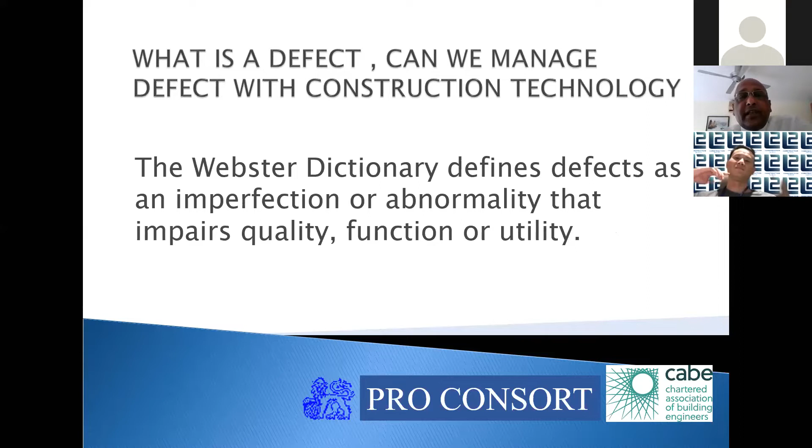If you look at a dictionary, one of the best being Webster's Dictionary, it defines defects as an imperfection or abnormality that impairs quality, function, and utility.

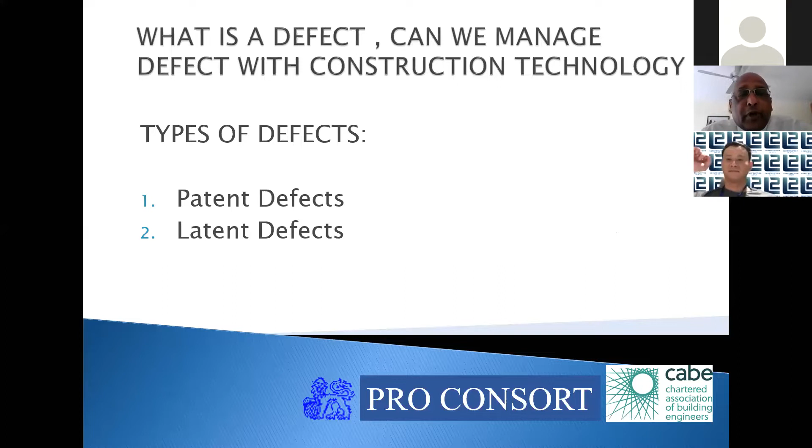There are generally two types of defects: one is the patent defect, the other is the latent defect.

What is a patent defect? Patent defects are obvious—something you can actually see, observe, and visualize by eyesight. Often that means it's an easy fix. These defects are surface level and often merely aesthetic, so accessing and repairing the issue is typically not invasive.

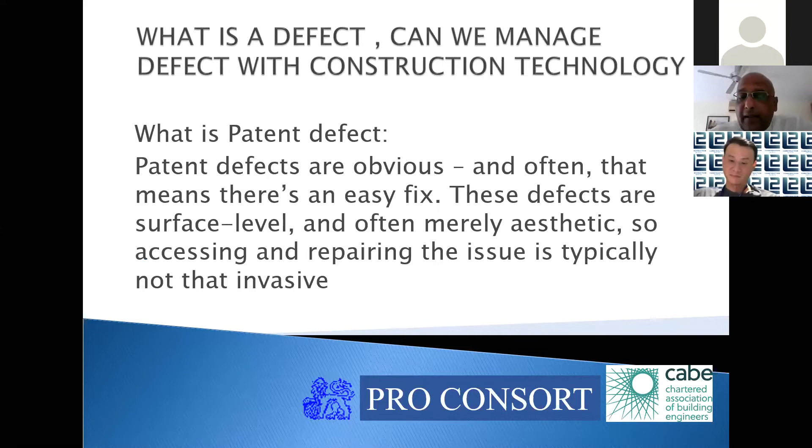What is a latent defect? Latent defects aren't obvious—that usually means they are below the surface, even a defective system in a project. As a result, latent defects tend to be more problematic since it mostly becomes obvious after the defects liability period has expired. These are usually related to design issues, but not exclusively.

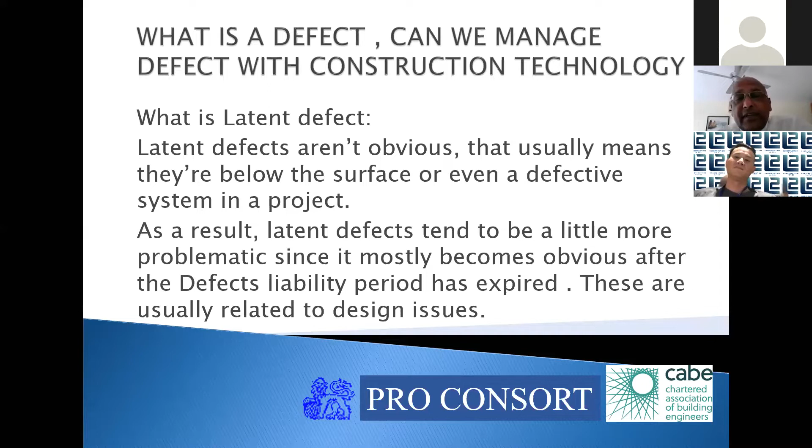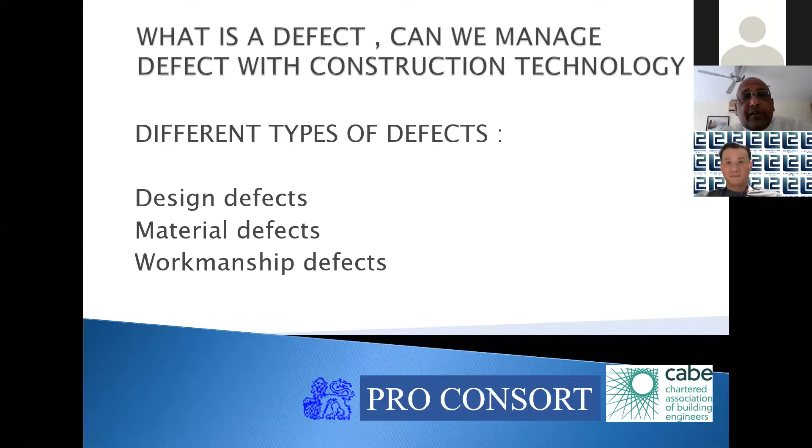From there, we differentiate into another group, what we call other areas of defect: design defects, material defects, and workmanship defects.

Now, basically, from our local research and from CIDB and other associations, we have come out to 5 areas that defects can be defined as follows.

One, non-compliance with building codes and UBBL, meaning Uniform Building Bylaws. Two, non-agreed variation from approved drawings. Failure to meet agreed contractual specification. Premature product failure. Failure to achieve acceptable industry levels of quality and performance on items specified.

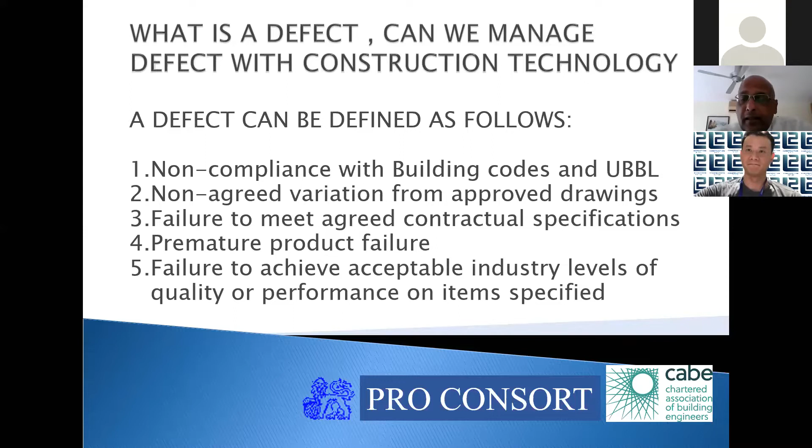Now, what constitutes a defect can change over time with fair wear and tear, settlement, weathering, or aging of materials. Therefore, what constitutes a defect at handover may not constitute a defect after 24 months. Example, a deep scratching on a polished floor is a defect at handover, but may not be several months later due to fair wear and tear.

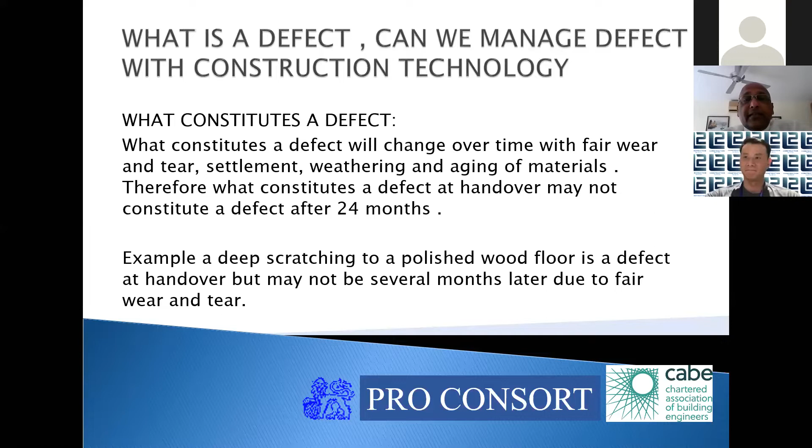If the contract specification and documentation do not provide sufficient information, the issue may be covered by an existing Malaysian standard or construction industry standard 7 by CIDB. The developer is required to remedy defects notified within 24 months of completion of the building works.

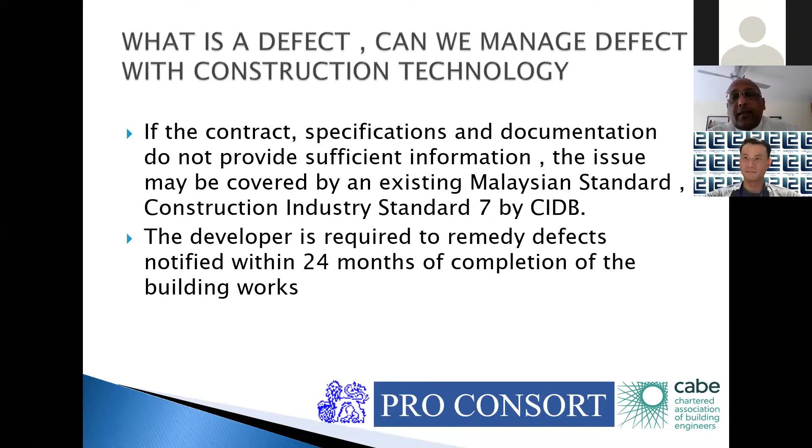Next, please. Now, what is not a defect? A developer cannot be held liable for an event that is not attributable to the developer. One, damage that occurs outside of human control. Two, damage done by a person outside of the developer's control.

Damage resulting from failure to undertake normal maintenance. Damage resulting from a failure to carry out repairs as soon as practical after the defect becomes apparent. Next, please.

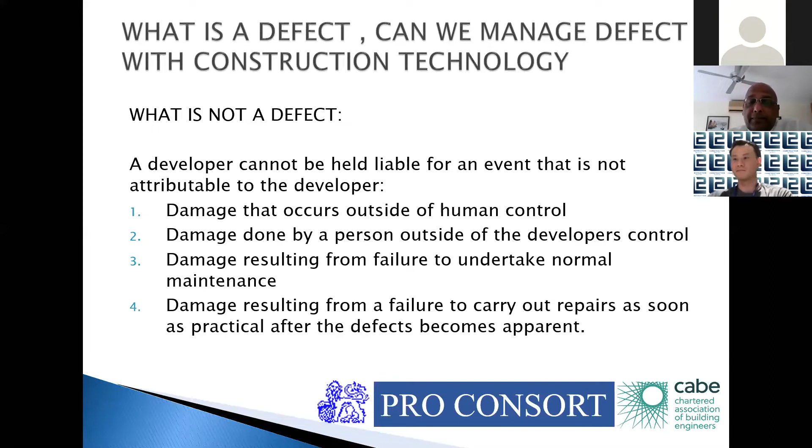Issues emerging over time. Where issues emerge after a 24-month defects liability period, this may still be covered under implied warranties or other legislation, but this may require the assistance of other consultants, building consultants, and lawyers' involvement to identify. Much more difficult.

Occupants' activities. Now, misuse or damage caused by occupants' activities are not considered a defect. For example, allowing water to sit on timber-based flooring such as parquet or strip flooring can lead to swelling and buckling of the flooring. This is not a defect because it is misuse or caused by the occupants.

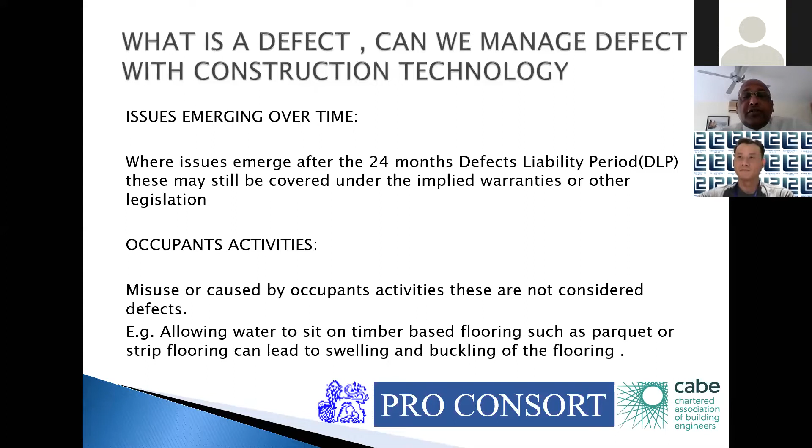Maintenance requirement. All buildings require ongoing maintenance. Any issues that arise through lack of maintenance to building elements, materials, appliances, or fixtures do not represent a defect. So if you take vacant possession of a building and you do not maintain your house and let water seep into the house, that is not a defect.

Design work. Now, design work is actually considered a latent defect. So latent defects don't surface very quickly. Normally you can only encounter this kind of defect after the 24-month period. Design work, carried out by architects and engineers, is included in other legislation such as the Architects Act, Engineers Act.

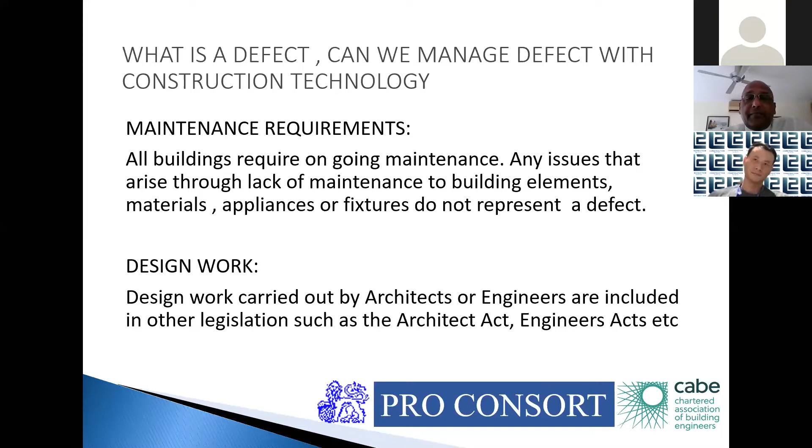Now, inspecting surfaces and fixtures. While some aspects of materials and workmanship can be measured, other aspects such as variations in texture, color, transparency, reflectivity, and finishes should be observed and assessed while in the normal viewing position. Normal viewing position is at an unobstructed viewing angle of 45 degrees or more, and if indoors, with a uniform typical level of lighting. Normal viewing position is an upright position.

You stand upright and then you look at the surface that you are inspecting. Now, the typical level of lighting should be diffuse lighting, not direct lighting. For example, for tile surfaces and painted surfaces, the viewing position is standing at a distance of more than 2 meters. At least 2 meters, you view the surface, and if you find a defect, then you record it down.

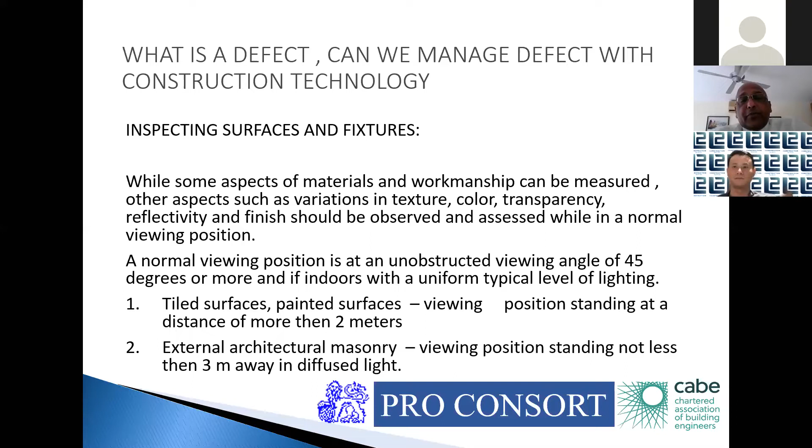Item 2 is external architectural masonry, viewing position standing at not less than 3 meters away in diffuse lighting. So these are some of the examples of how you would inspect.

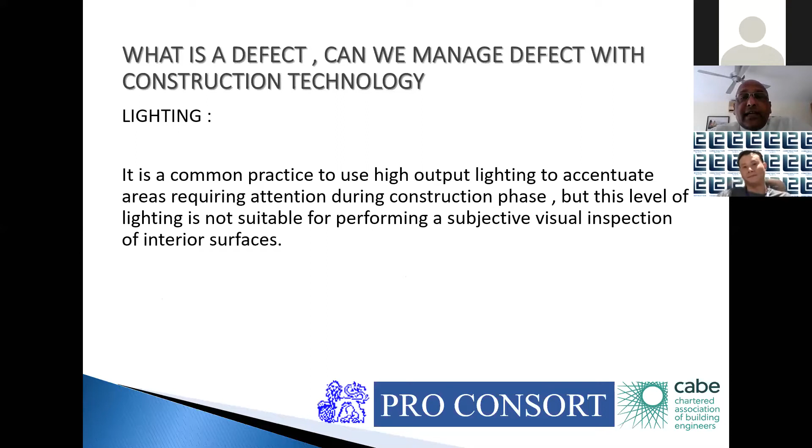Lighting. Now, it's a common practice to use high output lighting to accentuate areas requiring attention during the construction phase. But this level of lighting is not suitable for performing a subjective visual inspection of interior surfaces.

Next, please. Now, I have a recommended checklist. Normally a good developer will provide you with a checklist at the time when vacant possession and keys are handed over to the purchaser. But if he doesn't, then you have a sample that I've given here.

Which comprises of, you start with the internal finishes, you go to ceilings, flooring, and every item you record down what is the defect visually that you can see. So you start with ceiling, flooring, internal wall finishes, tiling, floor finishes, door and windows, electrical fittings and fixtures, plumbing, drainage, cabinet, and bench tops. Now, all these inspections are basically visual. You don't need to bring any other equipment.

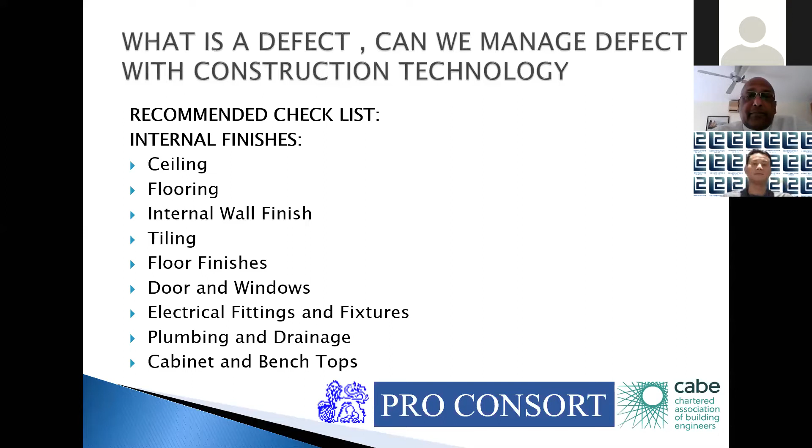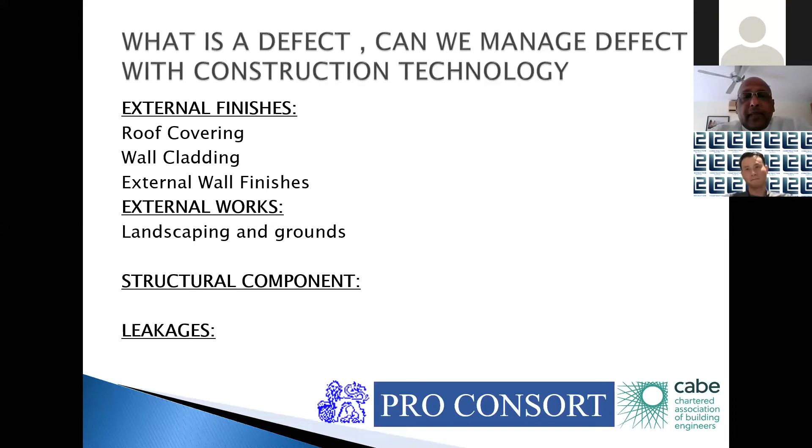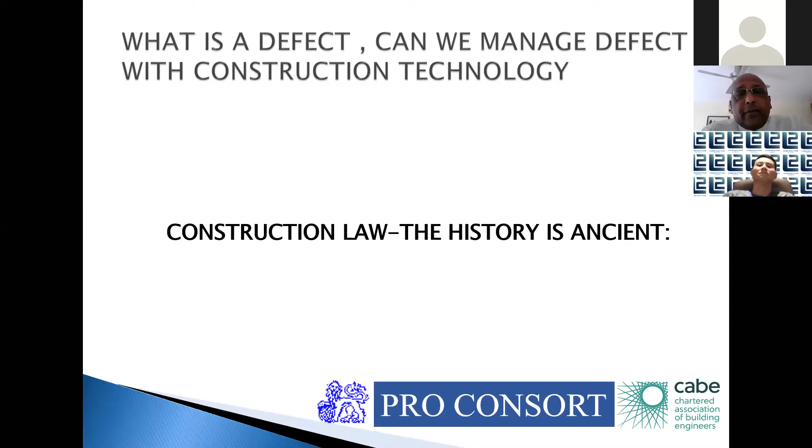Next, coming to construction law. Now I have dealt with the homeowners roughly, very briefly. Now I'm going to just talk about the construction law. The history is ancient.

Now, contracts have been around for a long time. The first is said to be the Code of Hammurabi. King Hammurabi ruled the kingdom of Babylon from 1792 to 1750 BC, that's about 4,000 years ago.

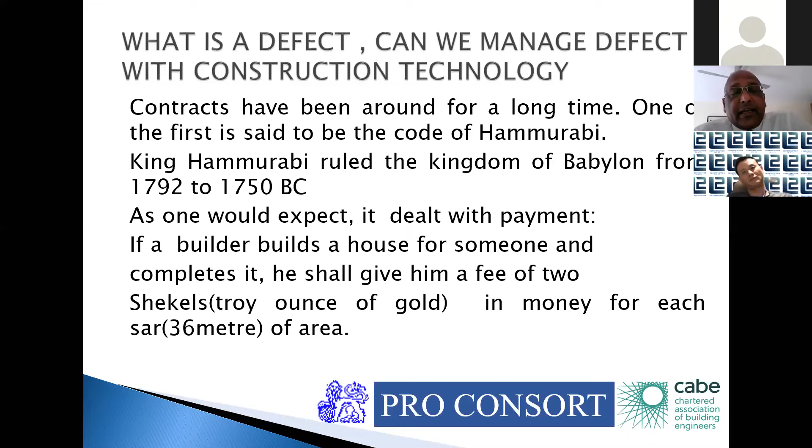As one would expect, it dealt with payment. If a builder builds a house for someone and completes it, he shall give him a fee of 2 shekels. That's around 2 troy ounces of gold, worth about 8,000 USD in today's money, for a sar of area, which is 36 meters, coming to about 360 to 380 square feet.

The code also dealt with responsibility for any defects. If a builder builds a house for a man and does not make the construction meet the requirements and the wall falls in, the builder shall strengthen the wall at his own expense.

If a builder builds a house for a man and does not make the construction firm, and the house which he has built collapses, causing the death of the owner of the house, that builder shall be put to death. If the son of the owner dies, the son of the builder shall be killed. This is very harsh, one would say, but this is 4,000 years ago.

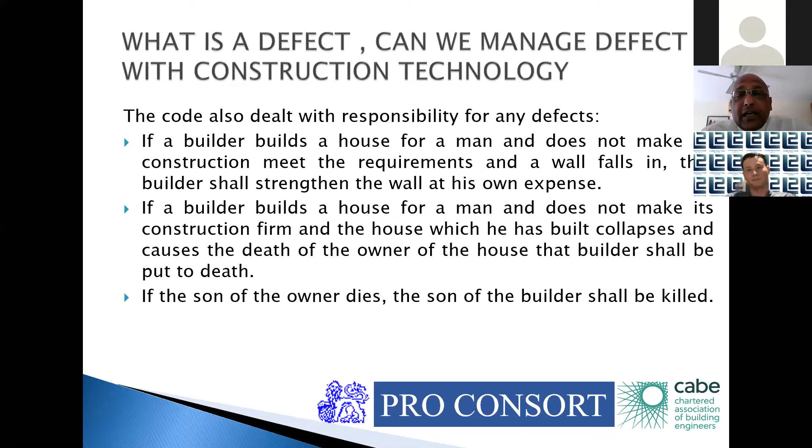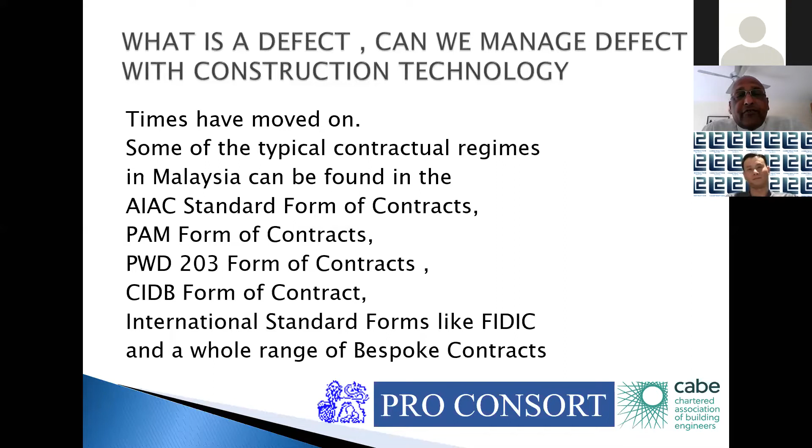Now, times have moved on. Some of the typical contractual regimes in Malaysia can be found in the AIAC standard form of contracts, the PAM form of contract, the PWD 203 form of contract, CIDB form of contract, international form of contract like FIDIC, and the whole range of bespoke contracts.

In Malaysia, our contract law is basically governed and enforced by the Contracts Act 1950. Section 38(1) of the Contracts Act provides that the parties of a contract must either perform or offer to perform their respective promises unless such performance has been dispensed with by any law.

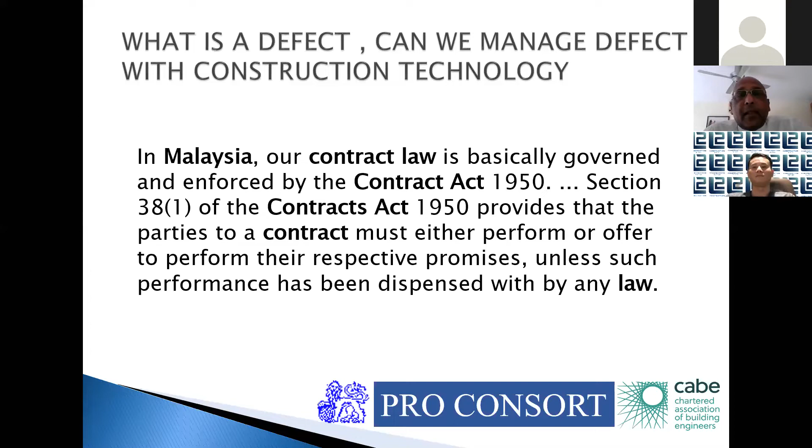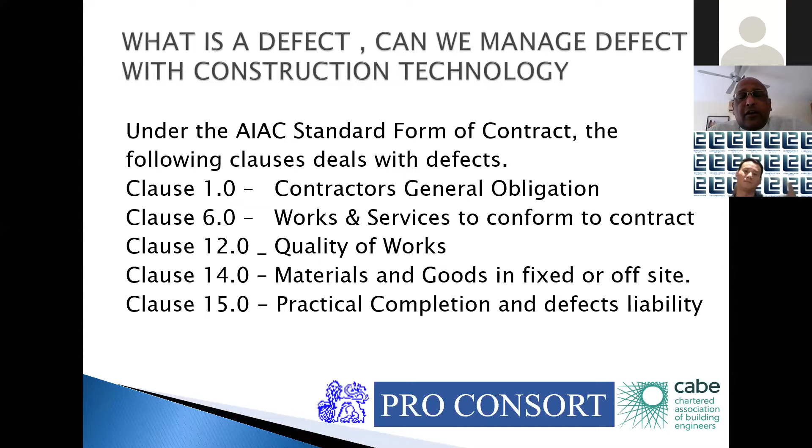Under the standard form of contract, which I've taken a typical example, the following clauses deal with defects. Clause 1, which is the contractor's general obligations. Clause 6, works and services to conform to the contract. Clause 12, quality of works. Clause 14, materials and goods in fixed or off-site. Clause 15, practical completion and defects liability.

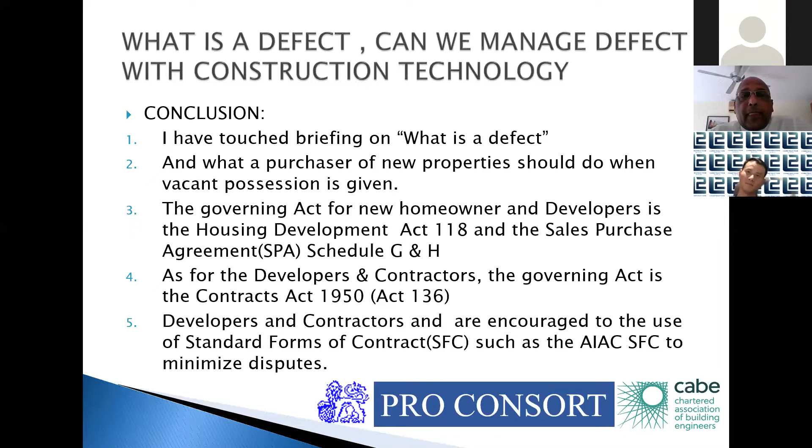Okay, thank you, that's the end of my presentation.

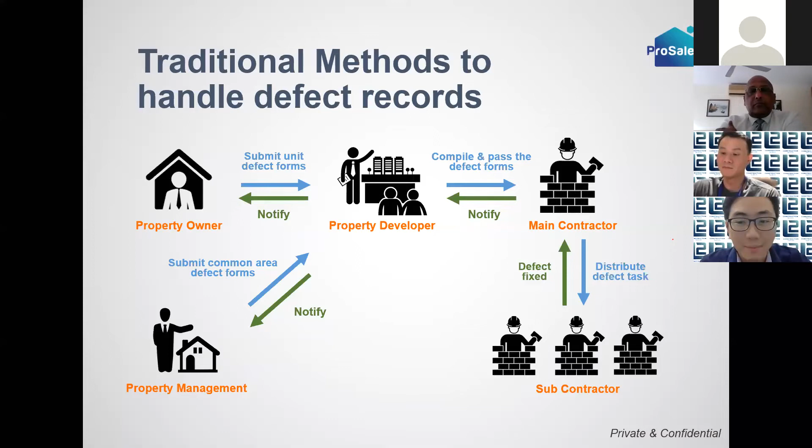But if we are currently using this traditional method, it will consume a lot of time. So today I would like to share the major pain points during the defect liability period for the developer and even for the contractor.

The first one is the time consuming in defect form submission and task distribution to the correct contractor. The submission process and the passing process, from the owner to the developer, all the way to the end contractor, consumes a lot of time. This is actually one of the biggest pain points, and the time consuming lastly leads to the contractor not having enough time to do their fixing.

The second one is the missing of physical defect forms. Everyone is taking the defect form and passing it along, so there will surely be some defect forms that become missing.

Then there's poor document management. Because in the physical method, all the document management has to be very organized. If one of the admins doesn't do the documentation properly, all the defect forms can very easily become messy. The last one is low contractor KPI due to poor defect task management.

For the contractor, what they receive as defects is based on what the developer passes to them. If between the period when the developer passes the defect details to the contractor something is not tallying, it causes issues.

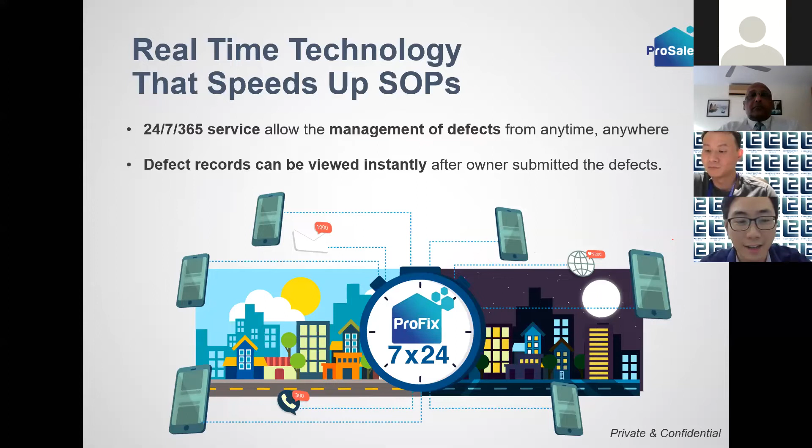Then there's the overview of the defect records. Inside the system, the platform is able to provide analytics and insights to let the contractor or developer know the progress or status of defect records, whether it's currently in progress, being fixed by the contractor, already completed by the contractor, or pending verification from the property management side. So all the defect-related information can be viewed in the mobile app or the website.

Besides that, since the defect liability period always comes with the vacant possession, where the owner has to make appointments and do the key handover, the system can make this as easy as booking cinema tickets. You just see which day and what time slot is available, then book the period to proceed with the property handover.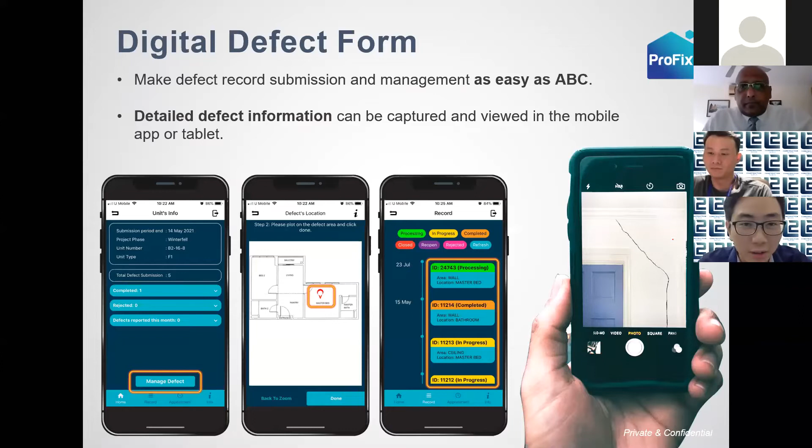Even for the contractor, when the defect is submitted on the owner side, the developer or contractor directly gets a new notification about the new defect record and who submitted it. When they click into the details, it shows the whole defect detail, including the photo.

For defect record assignment, one of the largest issues for the main contractor is that they need to manage maybe 5 or 6 subcontractor teams, each handling a different category of defects. Using the traditional way with physical defect forms, the main con has to distribute all these tasks to them, and when finished, collect back all the defect forms. But using the technology, you can directly pre-assign the defect record instantly when it's created. Everything is digitalized and no human contact is needed.

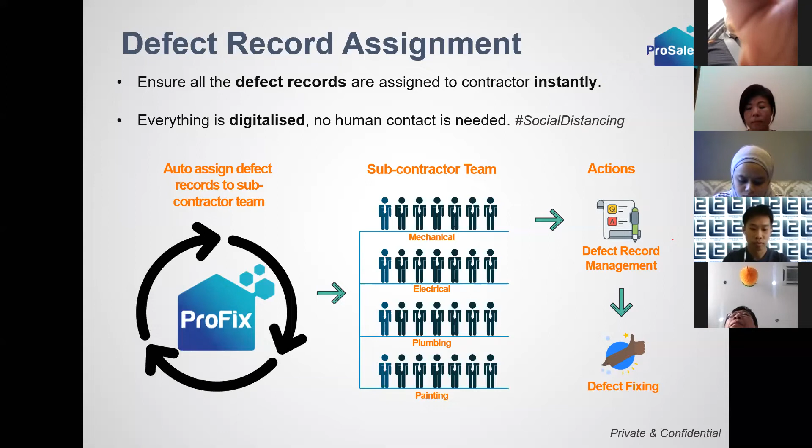The last point is paperless management. By using the technology, we can eliminate all the traditional defect forms, so there's no more messy documentation and no more defect form missing issues. Everything is organized and kept digitally. Whenever you want information, you just go to the platform and search for whatever you want. So basically this is my presentation, but now I want to do a quick demo of how the technology really helps the developer or contractor.

So you can all see from my screen, this is my mobile app. Sorry, hello. Okay, for now you can see from my screen, this is my mobile app, which we call ProFix, used for vacant possession and also the defect management system.

When you click inside, you're able to view things starting before the defect liability period, the DLP. All developers have to send out clearance notices to the owner, and then the owner is only able to make appointments.

Using our system, the owner is able to make the appointment themselves. After they make the appointment, the property management and developer side can directly view which units and who is the person in charge for the handover on that day.

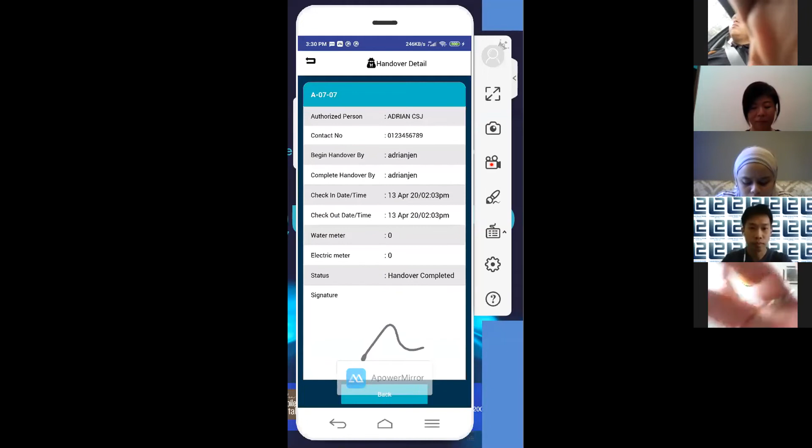This is an example of an appointment already done but not yet checked in. For an already completed handover, when you click on it, you can see when they checked in and checked out, the water meter reading, electrical meter reading, and even the digital signature for the handover.

Besides that, we can also capture the inventory checklist showing the spec, and what items, like how many keys, were passed through during the handover session.

After the key is handed over to the owner, the owner is able to directly submit a defect. Let me show you how easy it is for the owner to submit a defect.

So when they click on the unit, let me find a unit as an example. There will be the details of the owner. Then after I click on manage defect, what the owner has to do is it will show the layout plan of their unit, and then they just click to plot the details.

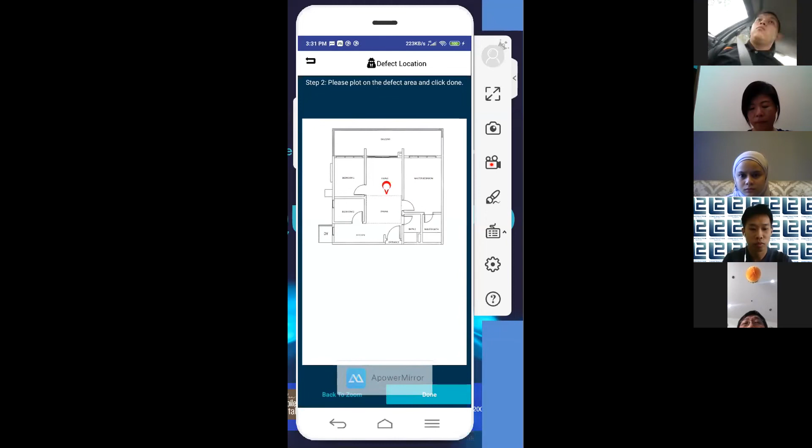For example, this is the master bedroom, and when you click done, there will be selections like the location, master bedroom, what is the area, maybe the ceiling, and what is the defect category, maybe crack ceiling.

After that, they are able to submit and take a photo of the image. For example, I take the photo here, then click upload, and if there are any remarks, you can write them out.

After that, you just click on 'Sure', and the defect report is already submitted. This is very easy for the owner.

When the owner successfully submits the defect record, on the contractor or developer side there is a today list which shows all the unit defects submitted by the owner that day. Let's say this is the example—they already submitted just now.

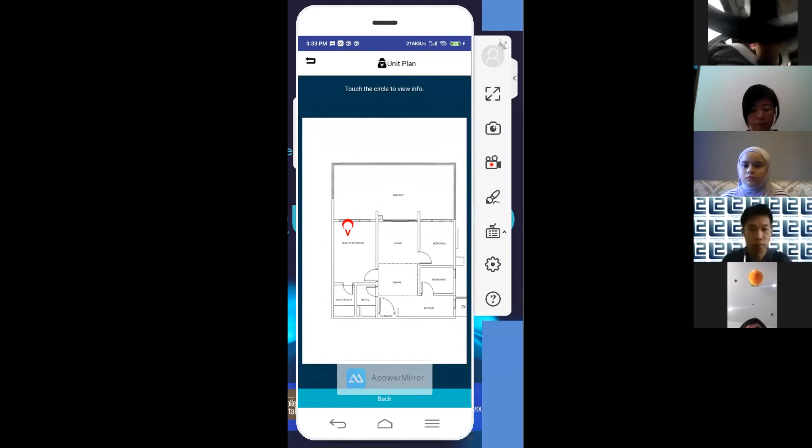All this can be directly assigned to the contractor so they can proceed to fix the defects. You can see the defect area, which part is affected, and the contractor directly uses our app while fixing the defect on site. They just bring a mobile app and are able to directly go to the site and do the fixing.

After that, the contractor gets a defect unit listing already assigned to them. For example, A2201 'in progress 12/14' means there are 12 defect tasks currently in progress, pending fixing.

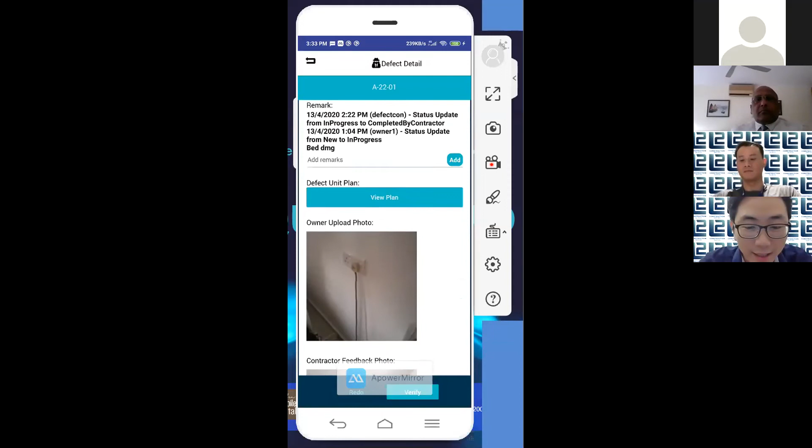Once they've fixed the defects, they can directly upload a photo of the fix, so the developer or property management side can do a comparison—seeing the before and after of what the owner uploaded and what the contractor fixed.

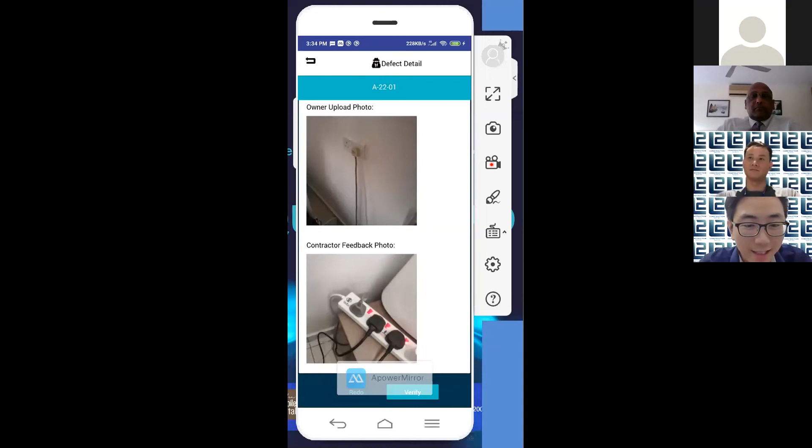The management side can then verify whether it's already fixed or ask the contractor to redo it. If everything looks good, they click the verify button, confirming the defect record is fully fixed, and it will show as already verified by admin.

If it's a closed case, the owner receives a notification telling them the defect item is already fixed by the contractor and to please check on their side. So basically, this is what our system handles for defect management and defect records.

Besides that, our mobile app also allows filtering by due date left. Contractors are always rushing to meet due dates, but if there are too many defect records, they may not know which ones are about to expire or become due soon. Using due date filtering helps them prioritize which to fix first.

So this is what I wanted to show you all—how the technology helps the developer side and the contractor side in managing their defect records.